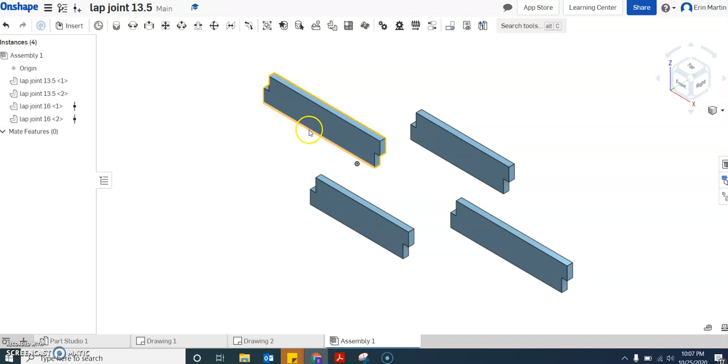One of the first things we need to remember when doing an assembly is we want to take one of our objects and make it fixed. So I did a right click and this object is fixed in place. Actually, I want to unfix that. I want to fix in place this 13.5. I think that's actually a better view for me.

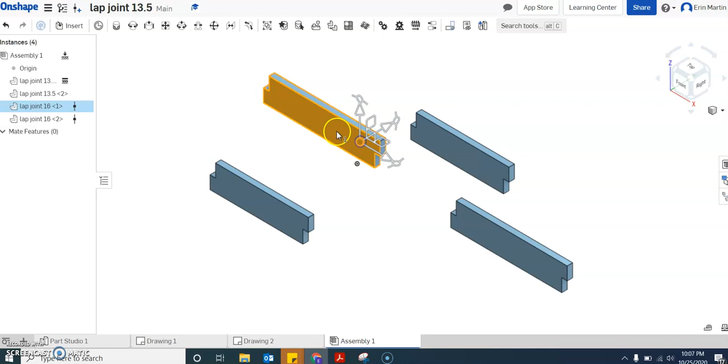Now we can come up here and grab this point right here and spin this piece around. I'm going to spin it 90 degrees because this gives me a better angle for how I see this assembly working. Now I'm going to go ahead and do my mate.

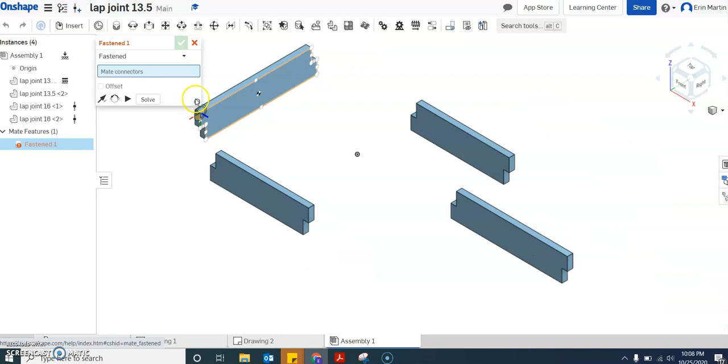So that mate, I'm going to try to get a better view for you. I'm going to do this corner, to, I want that inside corner. So I'm going to rotate to here. Yes, that looks correct. I'm now going to take this piece and rotate it this direction.

Oh, I need to get off of my fastener. There we go. You can tell I'm still learning this program. I'm watching the little degree marker. I want 90 degrees.

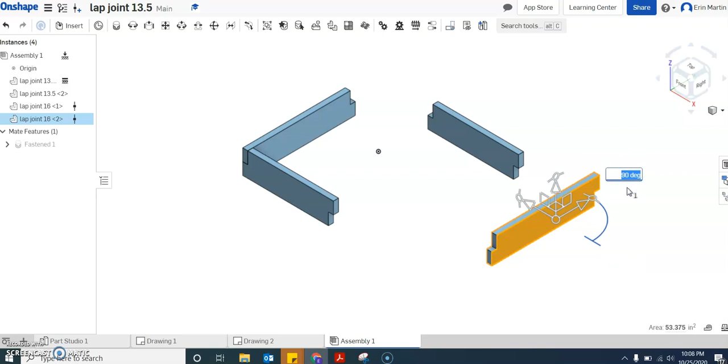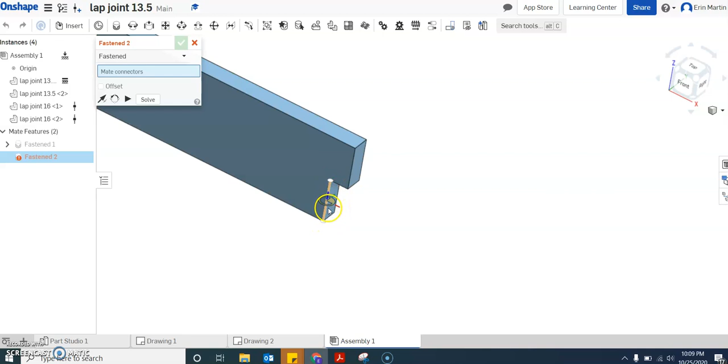I'm going to do my mate fastener. And I'm going to do, thinking... no. I'm not getting things to spin the way I want.

That corner, to... oh, I had it for a split second there. That corner.

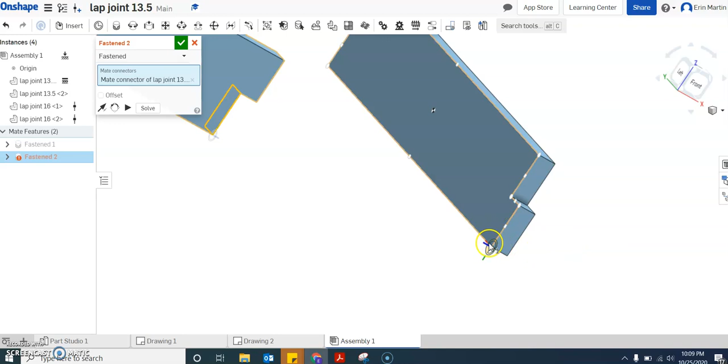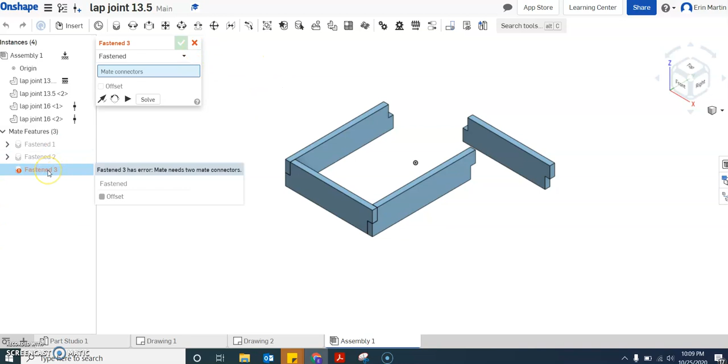Now on this particular piece, I need to click there to say yes, I want that fastener. I'm not sure why it's giving me this error message. Maybe it'll, to be determined. Maybe we'll determine it here in a second.

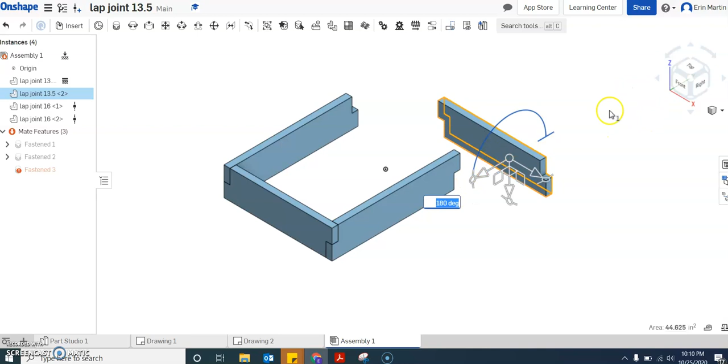So this particular piece, I need to rotate a lot to get it into place. I need it to flip this way, so that's 180 degrees. And I'm going to spin, and I'm going to aim for my mate fastener for this point.

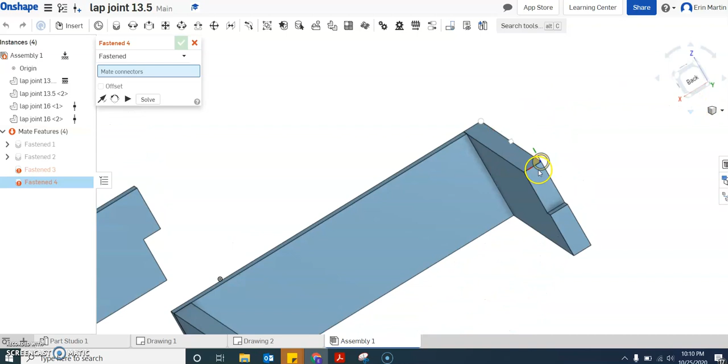And I think this point.

One of the reasons I let you see my struggles is because you're learning too and you're going to struggle. I have experience with other programs, but not this particular program, and I think it's good for you to see what I have to go through.

So I'm not sure again why those two are saying they're no good. Mate needs two mate connectors. Okay.

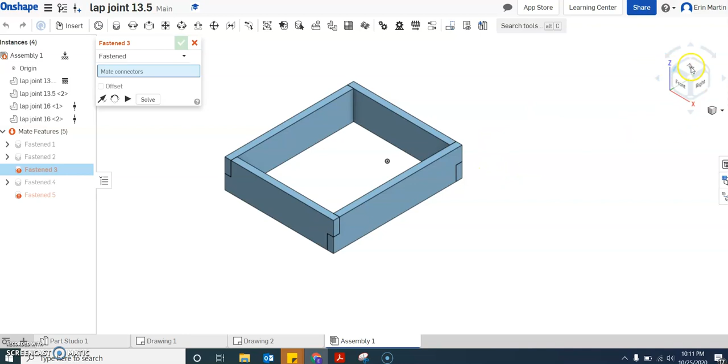So if I right click, I can edit this mate. I'm not even sure where that is. I know in another program I used, as long as you couldn't pull these apart, you were good to go. I hate to make that assumption

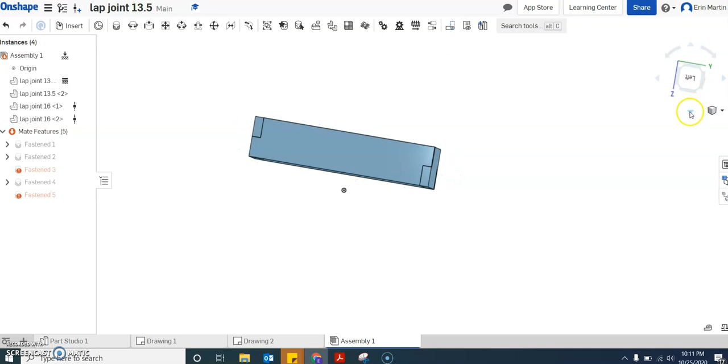because I feel like we're getting this error message for a reason, but I'm not sure why. And right now, everything looks to me like it is correctly assembled. So we're going to roll with it for right now. We might determine what the mistake is.

I may study it a little after I shut this video off, and even have to make a follow-up video to explain it to you.